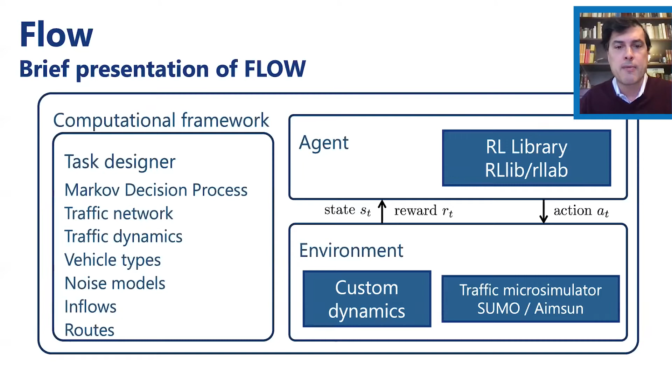So if you're interested in playing with this, there's a few startup cases and papers that explain how to do it. So if you're interested in using that software, you can do it. It's kind of Lego blocks: bring in your Sumo network, train it, and build on it based on what you have.

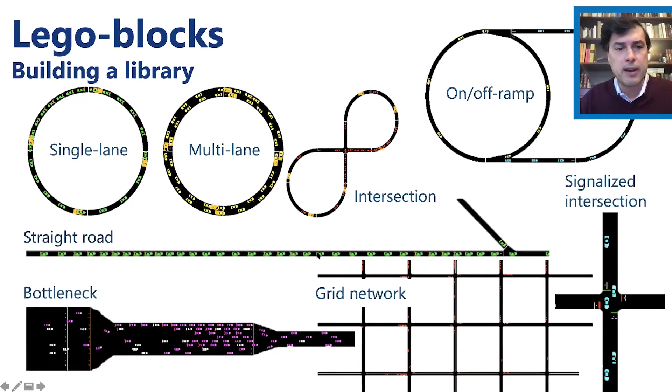One of the aspirations we had was to also create a dashboard. We turn it off now, but we're going to turn it on again later.

So the idea is we're going to do something similar with energy for traffic, and that's something we initially published at CoRL. What we're building now for the US Department of Energy is essentially a whole pipeline where we have a leaderboard. It's not accessible to the public, but we hopefully will have it live in a few months. So if you're interested, we're very happy to work with you.

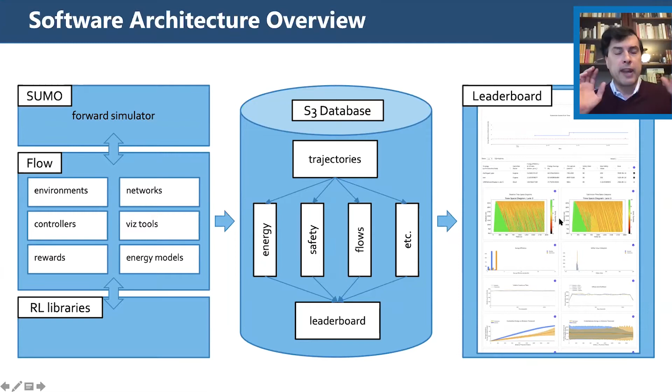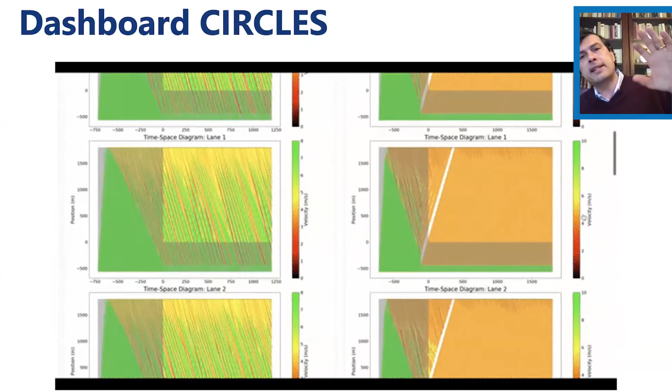So the idea is, again, you have calibrated models of specific freeways, and you can check in algorithms and compare them against each other. That's what that dashboard looks like from the inside. On the horizontal axis is the date, and on the vertical axis is the score, and you can see algorithms improving over time. Every time you check in an algorithm, it will show you a bunch of things on how it's doing on that particular scenario.

We also have done some workshops and once in a while do tutorials. So if you're interested, we can train you. And also I just want to showcase the team here. It's not just Berkeley — it's a fairly large team, about 50 people now.

So the headquarters are at Berkeley, but the test beds are in Vanderbilt. And we work very closely with Toyota, GM, and Nissan now, and the Tennessee Department of Transportation. So it's a multi-faceted team, which includes anything from AI to essentially hardware development.

For example, at University of Arizona, John Sprinkle, who is also in the program, has developed a libpanda-based comma.ai implementation pipeline that takes our policies and essentially migrates them to ROS, so we can experiment with them directly. That's kind of the way it looks.

So for example, he has — oops, sorry for that — he has a way to already remote drive the car. And this summer in Nashville, Tennessee, we'll be able to experiment with it in the field.

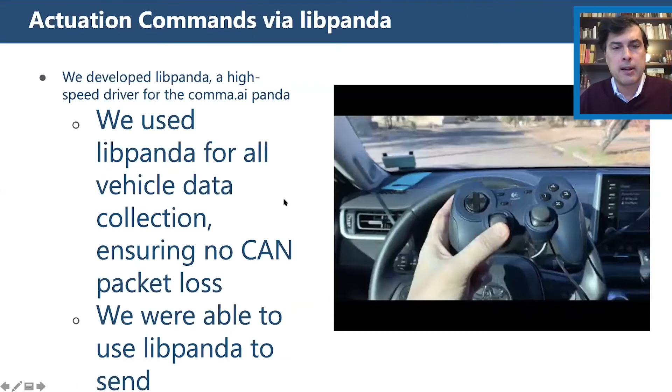And this is the test bed that Dan Work is now developing with TDOT, the Tennessee Department of Transportation, and that's going to be really our test bed. So there, what you see is an instrumented set of the freeway. They're deploying one pole, like the ones you see here, every 500 meters.

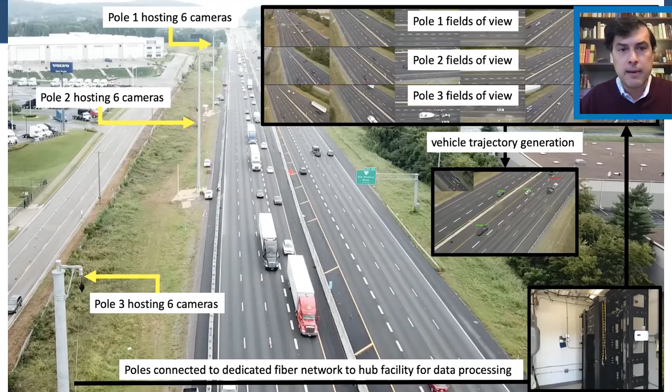So this is the first 3 poles when they deployed them. And I think there's a $12 million investment from the Tennessee Department of Transportation to instrument the rest of the I-24 freeway. Vanderbilt is very actively involved in erecting these poles.

You can see the first pole being erected right now as I speak. Essentially each of these poles has a 6-pack video camera system that will give us very high fidelity recordings of all the things I'm showing.

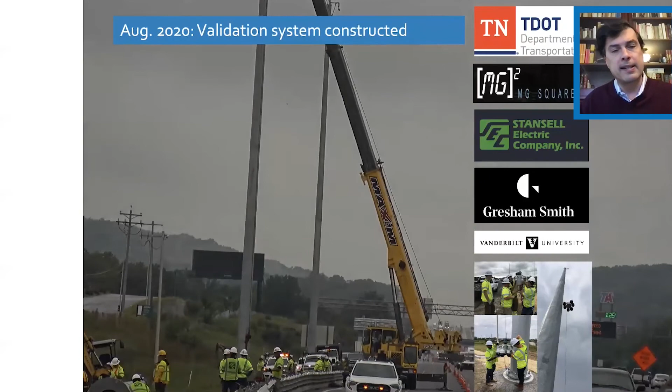So you can see with this pixel learning business I showed earlier, I think there is a lot of hope that one day one could use that also to operate that freeway. And this is the first pole of that project that I'm showing here.